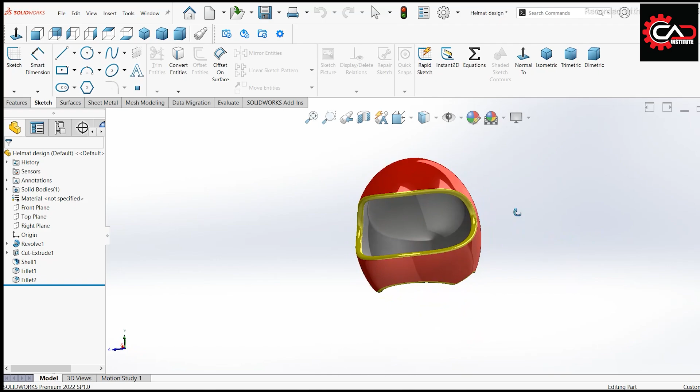In this video, I'm going to make this helmet design in SolidWorks using some basic features. So let's get started.

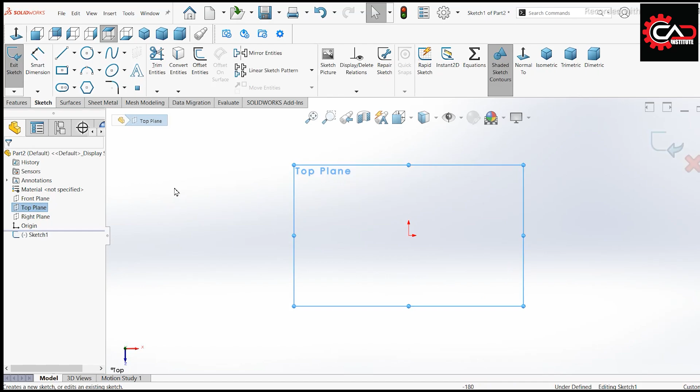Start with the new project. Start the sketch on the top plane. Select ellipse and draw an ellipse at the origin.

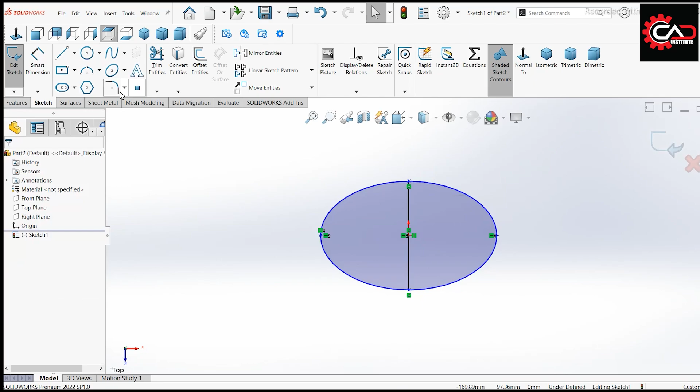Next, draw a vertical line from these points. Select these 3 points and make them horizontal. The distance between these points will be 500 mm, and this distance will be 400 mm.

Select trim entities, select trim to closest. Check this option, keep trimmed entities as construction geometries, and trim this line.

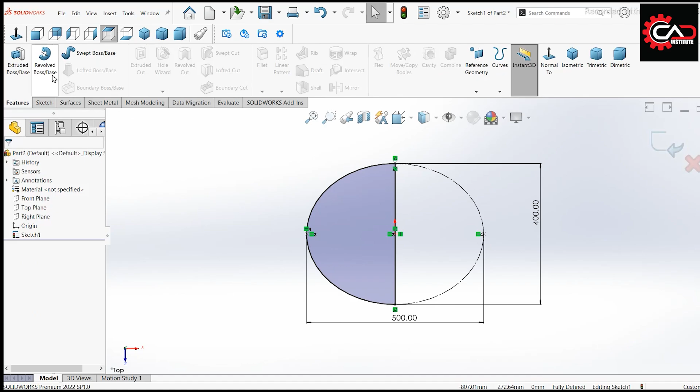Next, go to feature command and select revolve boss base, and select the axis of revolution as this line. Press OK. We have this first geometry over here.

Select front plane and sketch on it. Select convert entities and select this outer edge. Press OK.

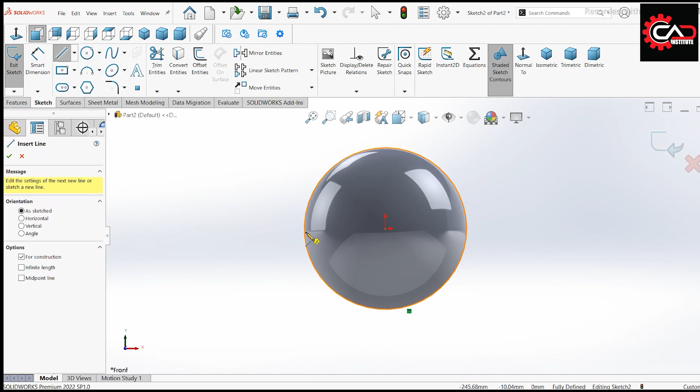Next, we will draw a construction line from these 2 points. Next, we will draw a sketch like this. The angle between these 2 lines will be 10 degrees.

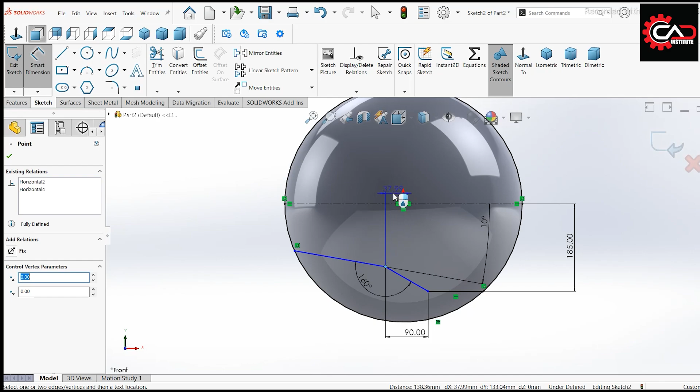The length of this line will be 90 mm, and the distance between these 2 lines will be 185 mm, and the angle between these lines will be 160 degrees, and the distance between these 2 points will be 35 mm.

Now again draw another construction line here, and make another ellipse here starting from these points, something like this.

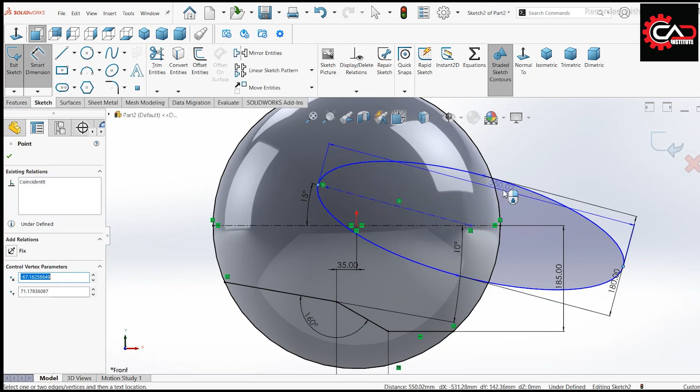The angle between these 2 lines will be 15 degrees, and this distance will be 180 mm. Similarly, this distance will be 390 mm.

And this distance will be 200 mm.

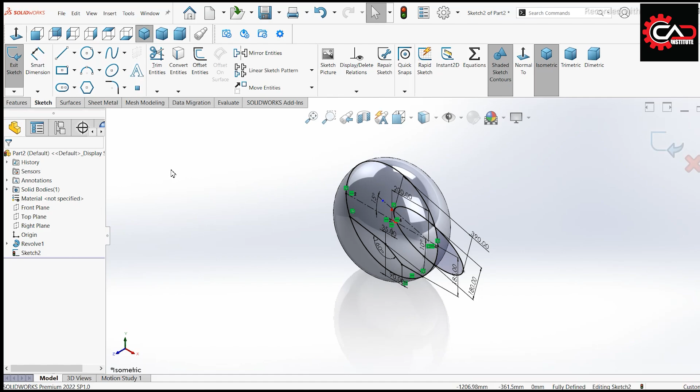We have completed our sketch, and we will go to feature command and select extrude cut, through all, both sides, and select these sketches. We have the first look of our helmet design.

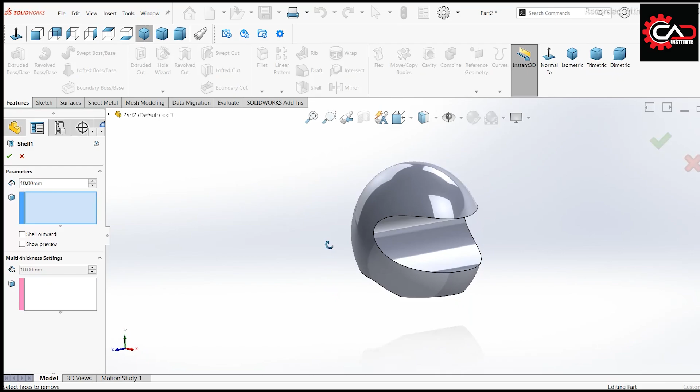Next we will select the shell command, and here the thickness of the shell will be 10 mm, and select these faces. Check this show preview option.

We have cut through all of the helmet.

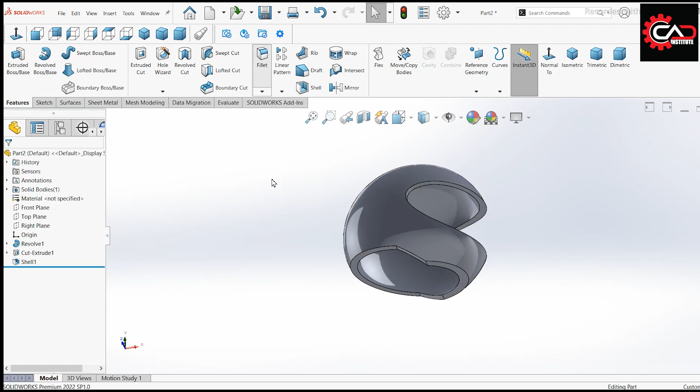Next we will select the fillet command, and the radius of the fillet will be 50 mm, and select these edges. Press OK.

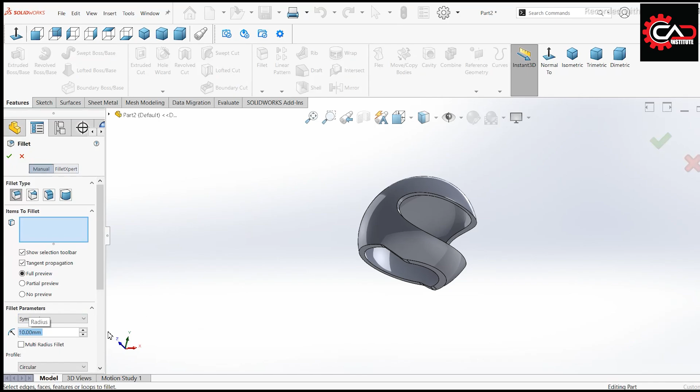Again select fillet. This time the radius of the fillet will be 10 mm, and select these inner and outer edges. Similarly, inner and outer edge. Press OK.

We have completed our geometry, and now we will give appearance to it, give some fine colors to the commands.

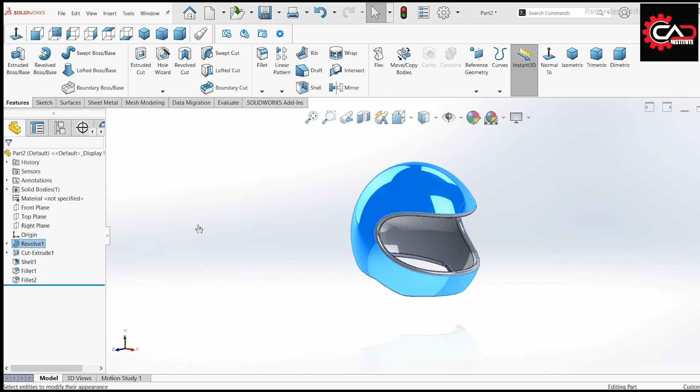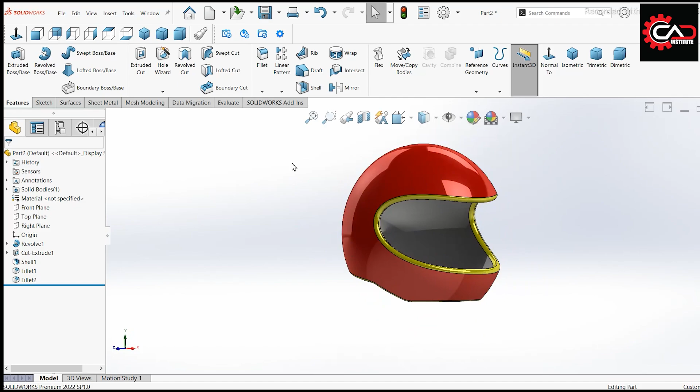That's it, we have completed our geometry, and we have designed this helmet in SolidWorks. So I hope you will like it. Thanks for watching.